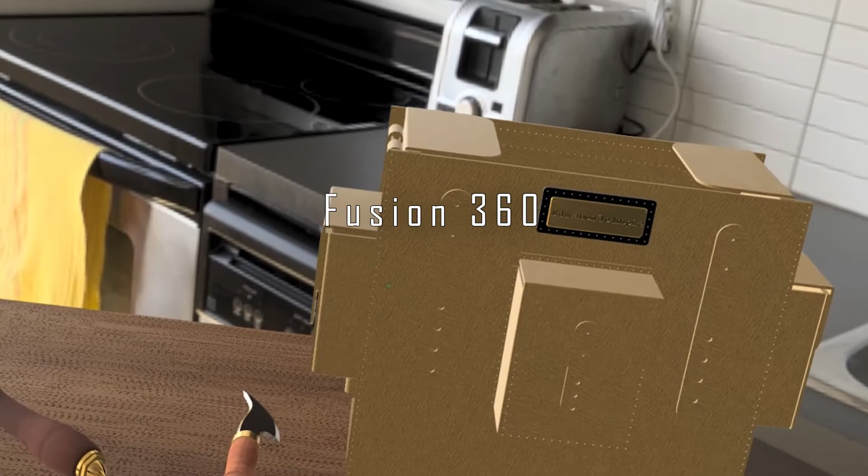Today, I'm going to show you how to use Fusion 360's sheet metal environment to model a large-scale leatherworking pattern.

The other day I was playing around with modeling this Explorer bag, and I wanted to make one that was a little bit more of a backpacking backpack than a laptop case. So I thought I'd just let you guys watch me go through the process. This is going to be a little bit less of a tutorial and more of a watch and learn demonstration. But I thought it might be fun for some of you who are getting more advanced with your modeling to check out what I'm working on, so hopefully you enjoy this.

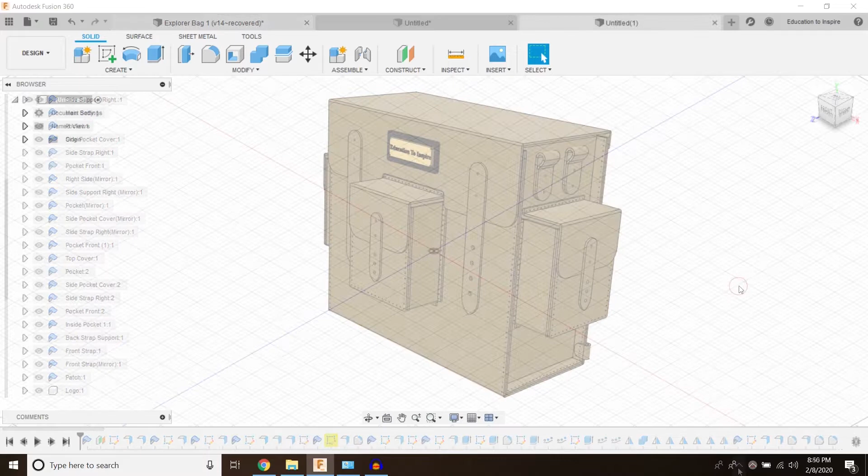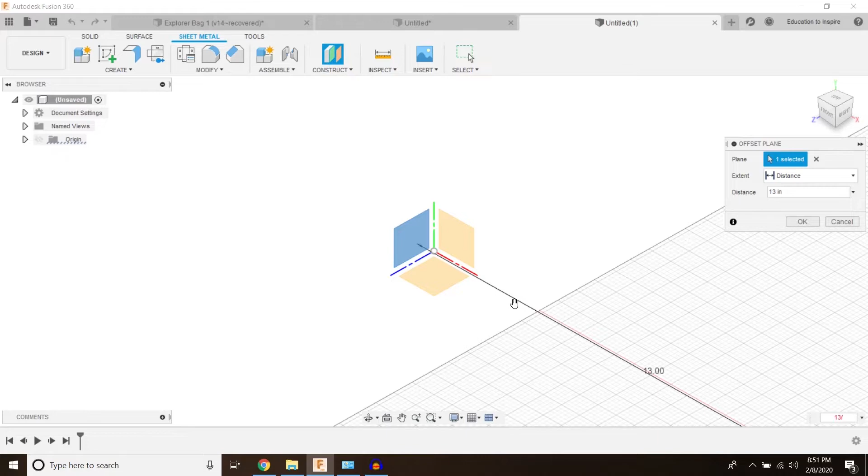Here we go. The first thing that I usually do is start in the sheet metal environment, and in this case I'm going to start by creating an offset plane. This is going to establish the width of my bag. I want it to be a 13-inch wide bag, so I'm going to say 13 divided by 2 in the menu. Create a sketch right there, and a rectangle, center point.

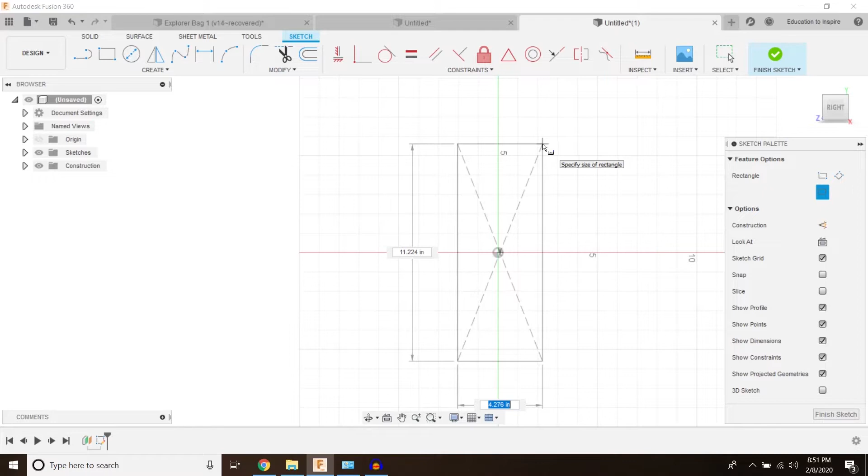It's going to be a nice big backpacking backpack, and I might alter the design later. But right now I would like it to be 8 by 23. There we go, so that's my first piece.

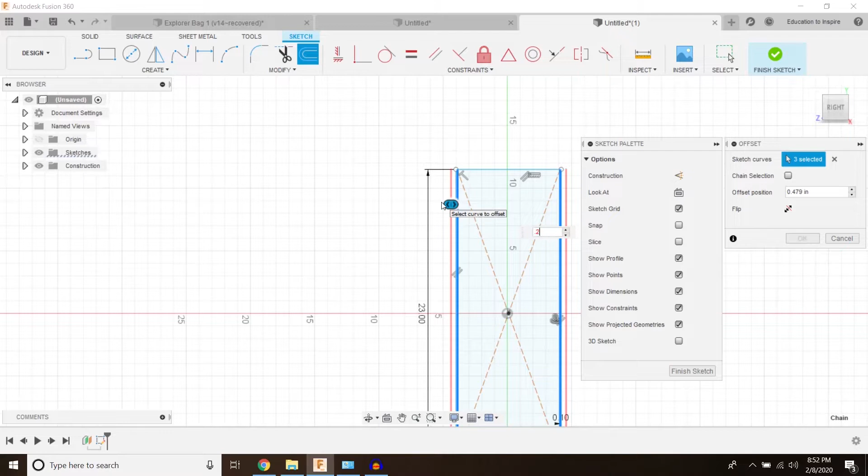I'm going to go ahead and create the other pieces right here. While I'm at it, I'm going to offset that by 0.1, the thickness I'm working with, and repeat that again. Select the first one, deselect that top line, and move that out twice the thickness. That should be all we need to get our first 3 components started.

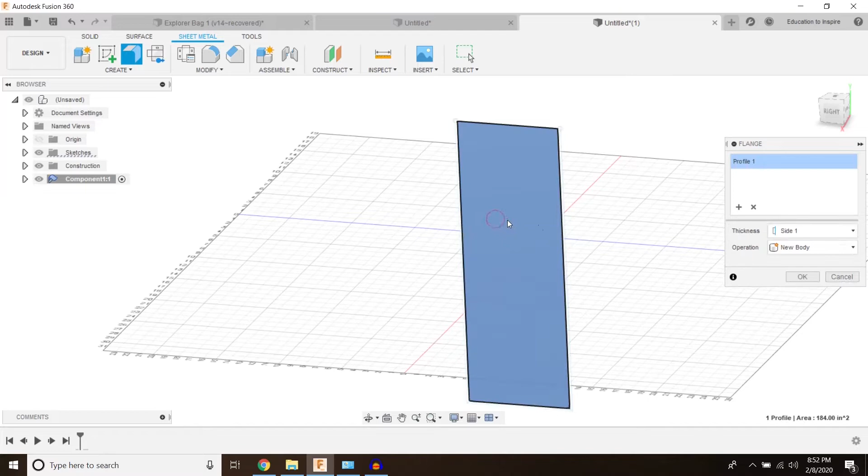I'm going to hit Finish Sketch, and now I'm actually going to create a component. So while I'm in my main body, click Component, create a flange from that right there. I'm going to hit OK, and start creating some flanges off of there.

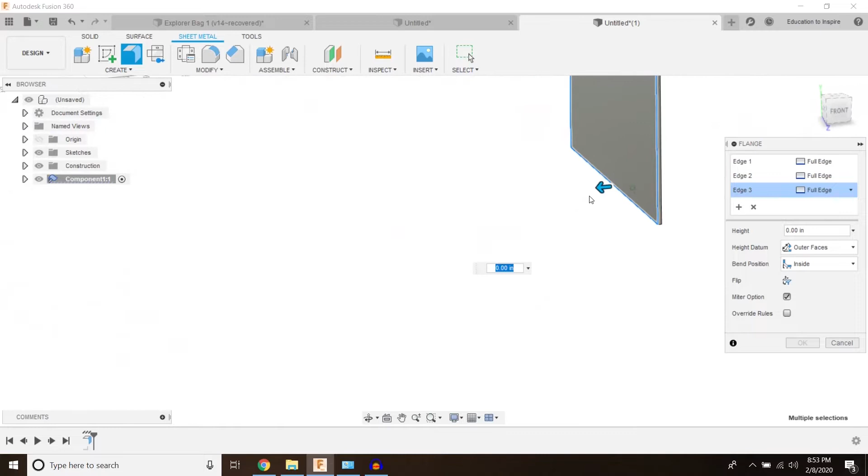And like that, to go about 0.4, I think, and I can always change that later. That's our first piece. New component.

Let's go ahead and start labeling these. Call it side. And this is going to be the brace.

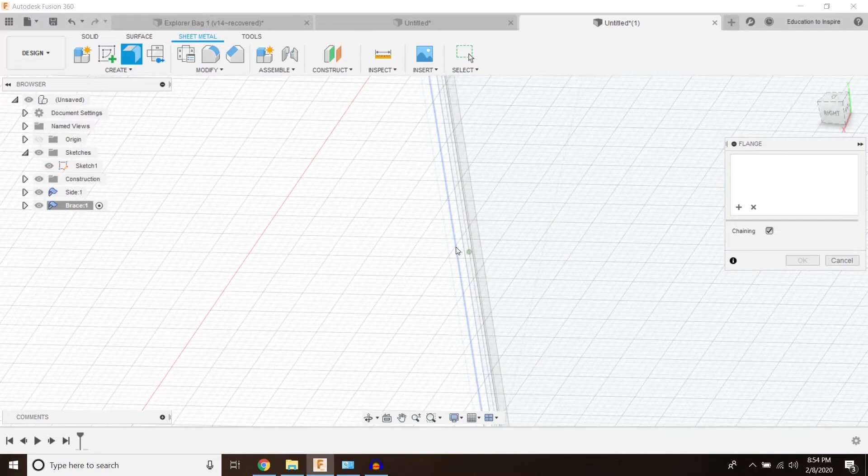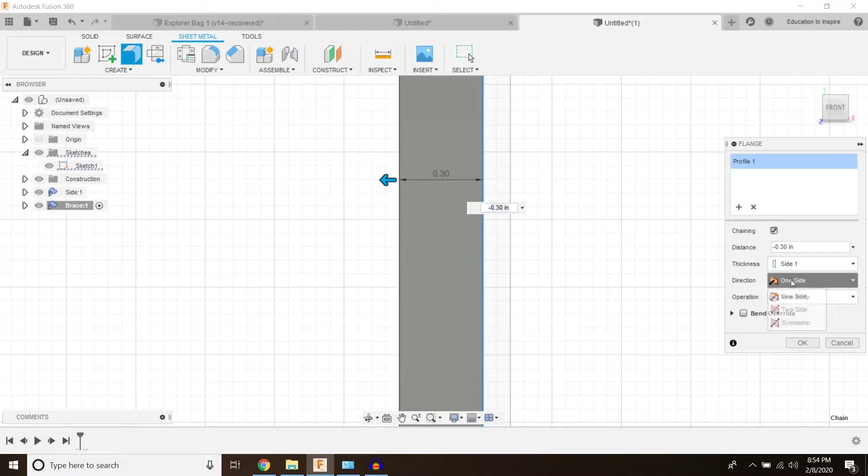So I'm going to turn back on that sketch, select that one, and come back. Looks like 0.3 there, and make it two-sided. Grab that other one, I'm going to come forward about a half inch, and that's going to give it some structuring.

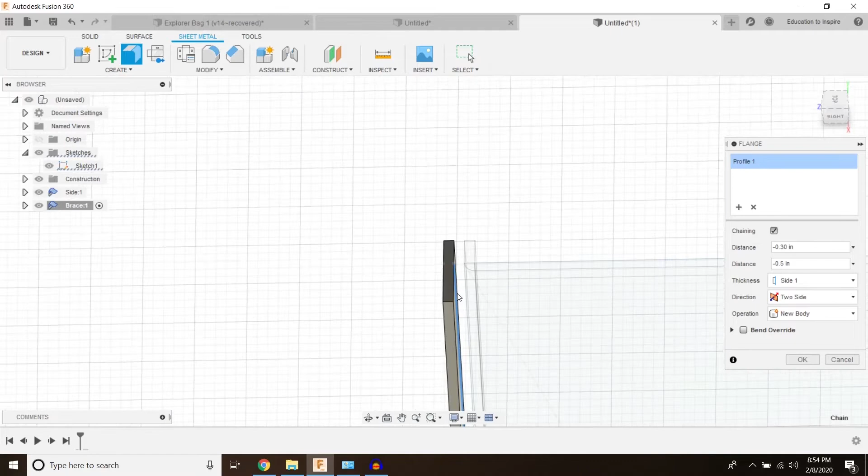Last thing I need to check is make sure it's lining up. And side 2. There we go, now we've got our pieces coming together.

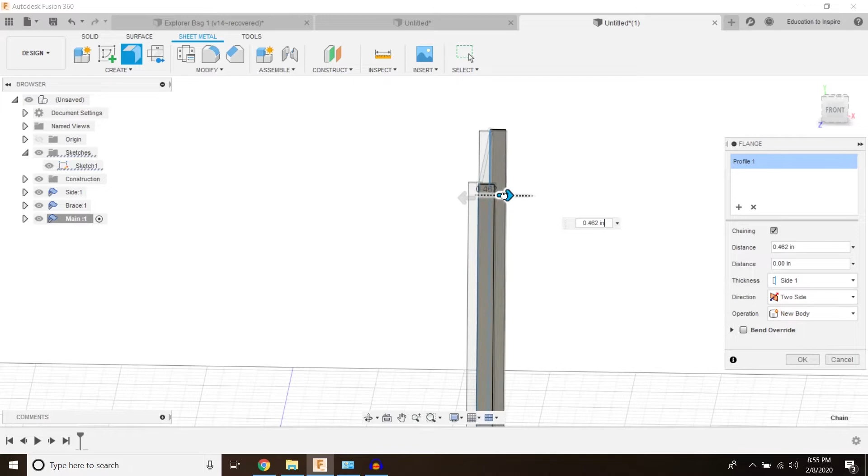Let's go ahead and create another component. This one's going to be the main component on here. And that's that outside line. I'm going to do that as a two-sided extrusion as well. That should be 0.4, 0.5, that's right, 0.5.

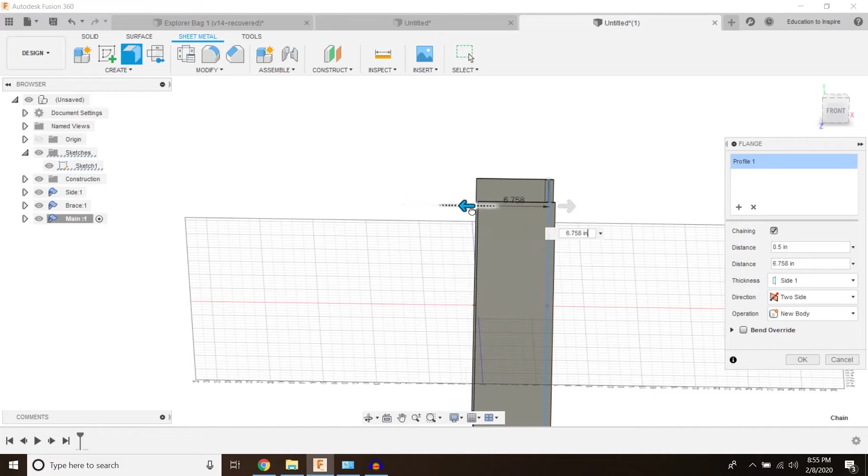And then this one is actually going to come back past my middle point, so I'm going to make it like 6.5—actually, I'll make it 6.7, just for visual purposes while I'm modeling.

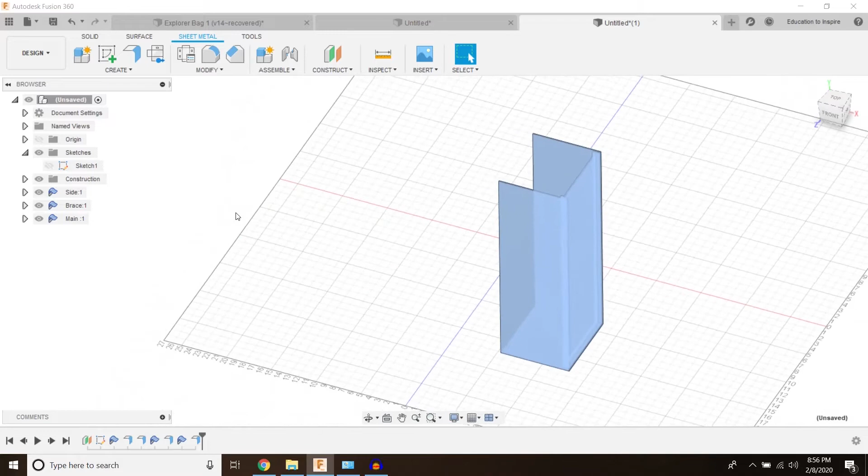Alright, so now let's shut off that sketch and take a look at what it looks like. And we've got a nice stitchable spot there and a stitchable spot there. Oh, forgot to do the outside edge—don't hit back, don't redo it. Double click on that flange, just switch sides. There we go.

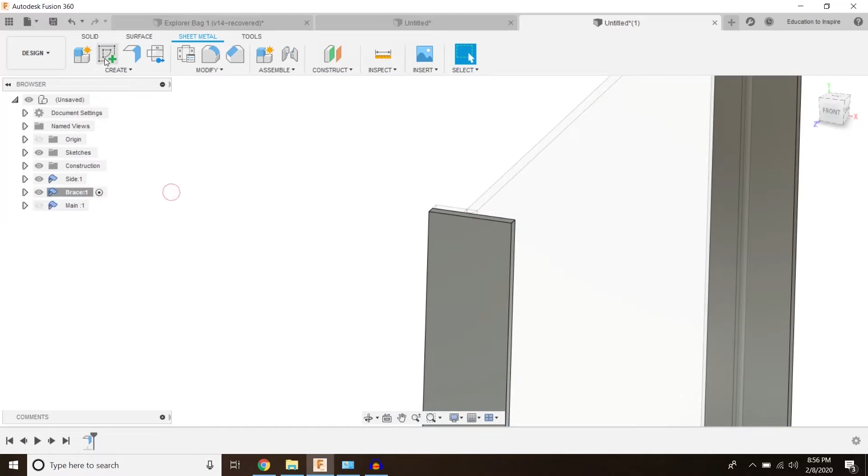Alright, so now I'm going to start putting some stitch holes in here. I'm going to shut the main body off because I want to stitch through just this portion right here. So I'm going to activate just the brace, put a sketch on that surface, make a circle, and start dimensioning. D for dimension.

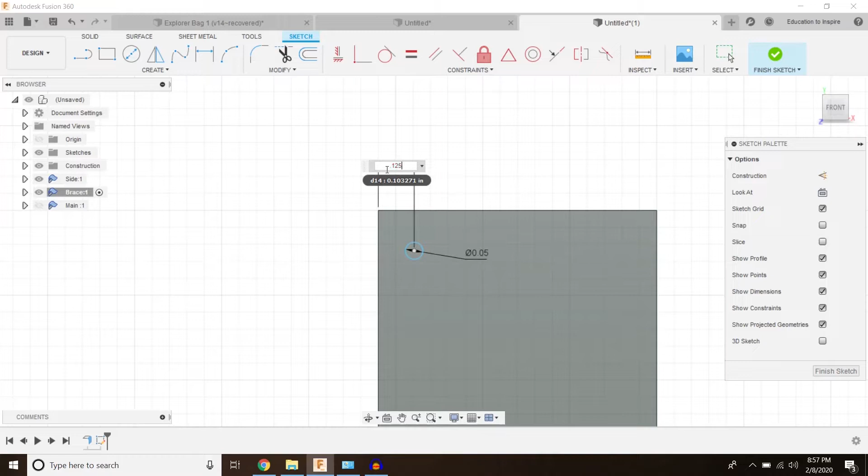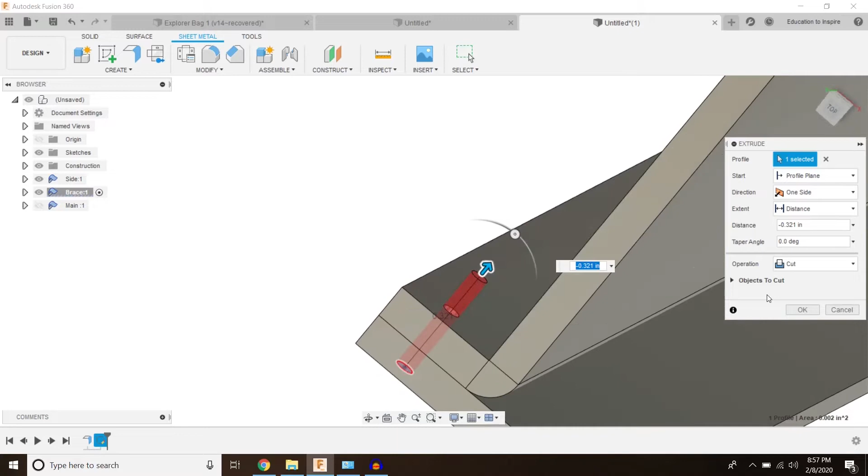0.05 for a stitch hole. However far from the edge you like—I just like it to be half the distance of my spacing. So I've got myself a spot where I can hit E for extrude, click, and cut through that right there. There we go, so that sliced through both pieces.

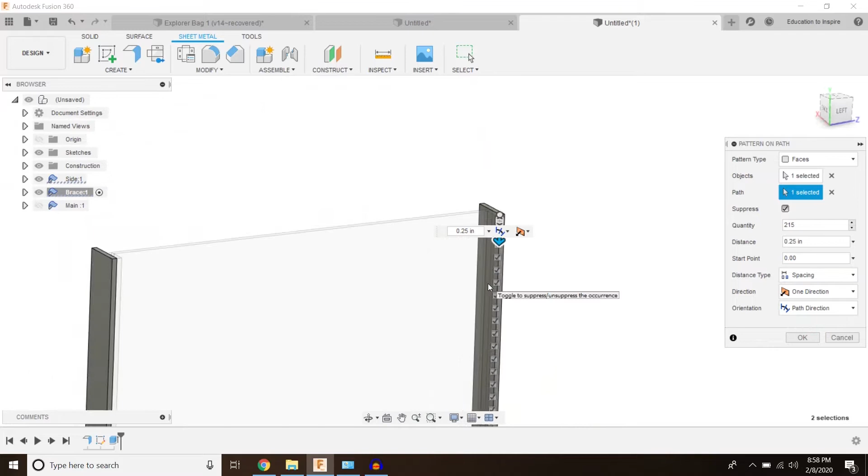So now I need to start creating my pattern along path. Create pattern, pattern on path, select your piece, select your path. You want it to be a spacing, and it's going to be a ton of them—I have no idea how many. Path direction, and come around to the other side and see how you're doing.

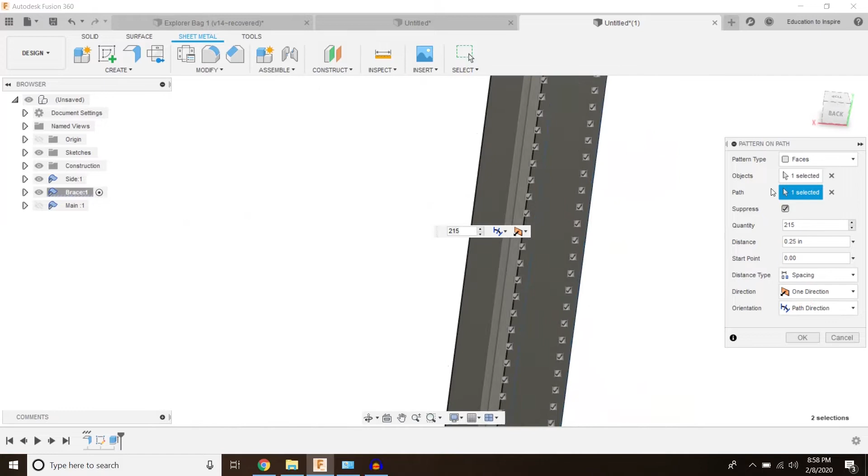I'm going to have to select a different path. Let's make sure I get that one right there—that looks much better. There we go, now come up here and check my spacing on the top.

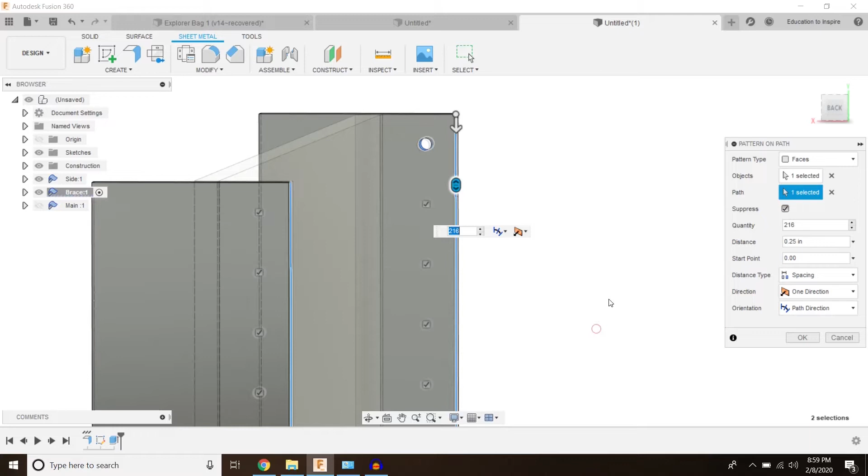One more. And I could check through it by setting my visual style to show hidden edges. Now I can see that I got that one. That's lucky that I got to do that one like that. Alright, so 216 stitches later, we've got ourselves our first set of stitches.

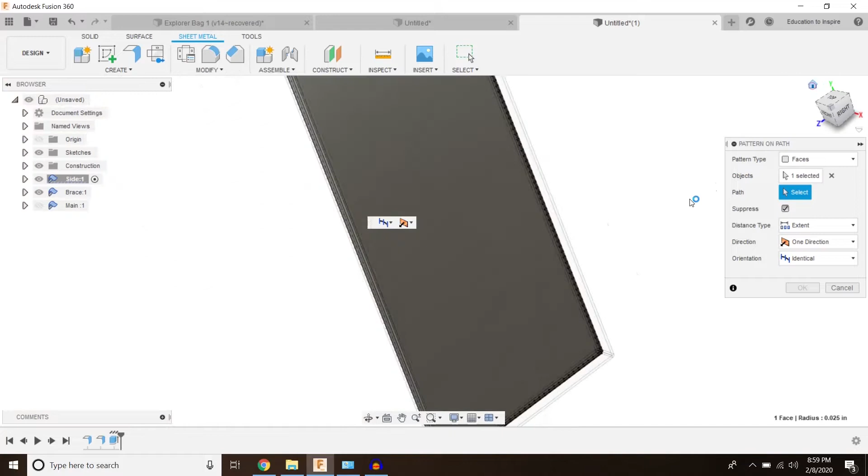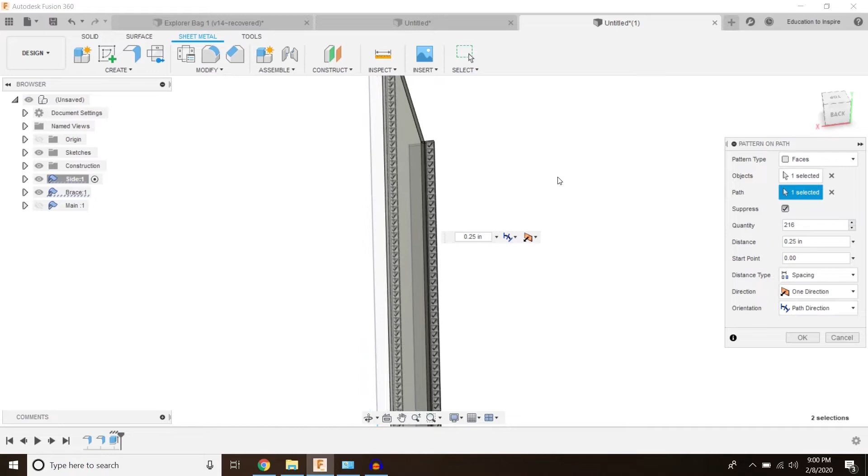Let's go ahead and put them in that side piece now. Create pattern on path. Grab the original surface, select the path. I want to make sure I get the right one this time. There we go, perfect. Pattern on path direction, extent to spacing, distance 0.25, number 216, and well, that just takes care of itself.

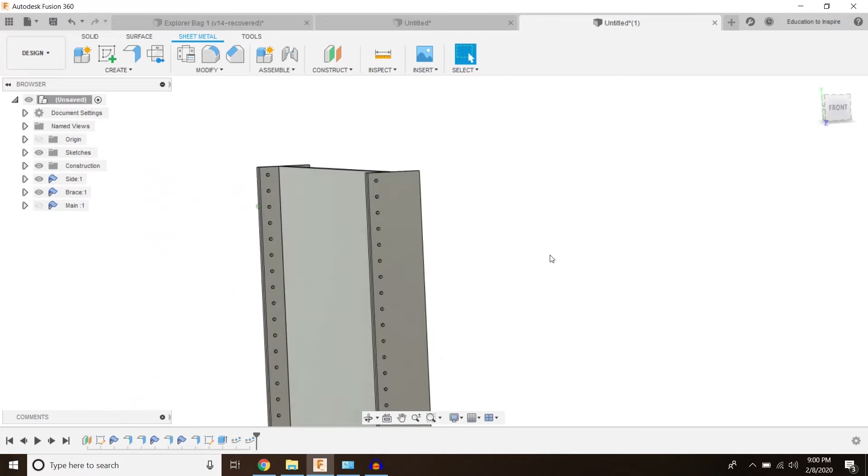So there we go, I'm going to shut that visual style back off to visible edges only. And we've got our stitched piece. So there's always a few little abnormalities along the way, like the way it goes through the corners of stuff, but just worry about that later after you've actually output the pattern, because you can change that in your PDF. So let's go ahead and put the stitching through our outside piece now.

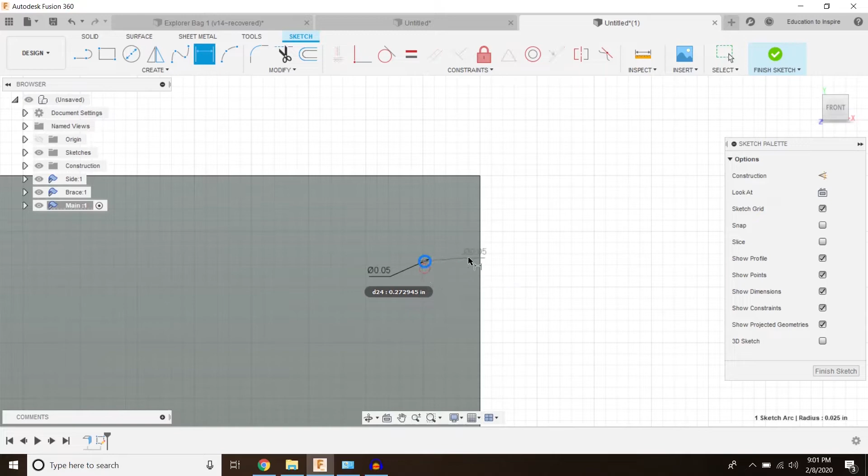Create a sketch, circle, dimension it, and you're probably going to want to play with your stitch size. That's just the needle I use. Measure your forks - can be a good way to get the stitch spacing you're used to.

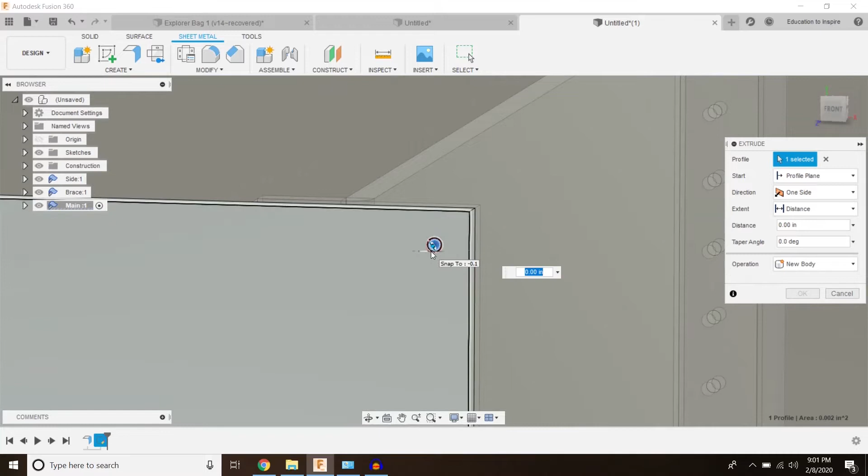Alright, there's my hole. E for extrude. Click on that thing, I'm just going to drag it through. I could say distance to right there or whatever, but I'm just tearing this out, so I'm happy with just doing it like that. Create a pattern on path.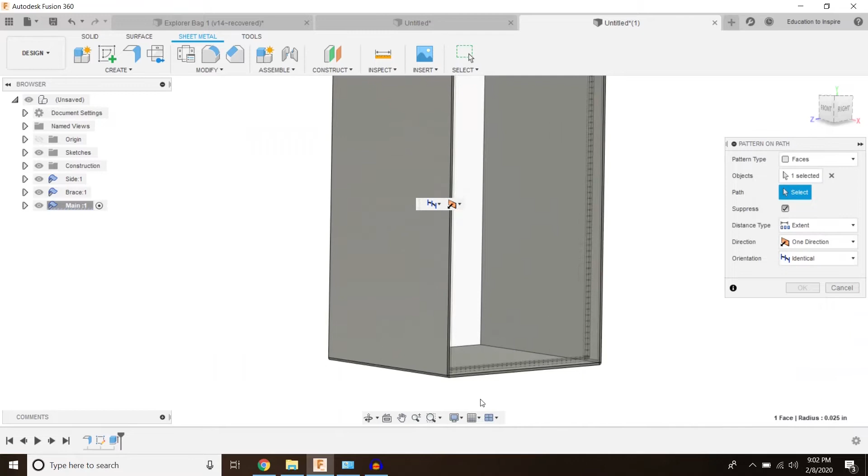Right there, select the path. Make sure I get a good constant one here. There we go, extent to spacing. And the direction we're wanting it to go. Start with the same number we had.

And see how we're looking. So it's a larger radius, so we're going to be coming out further. But that doesn't mean it's not going to line up pretty close.

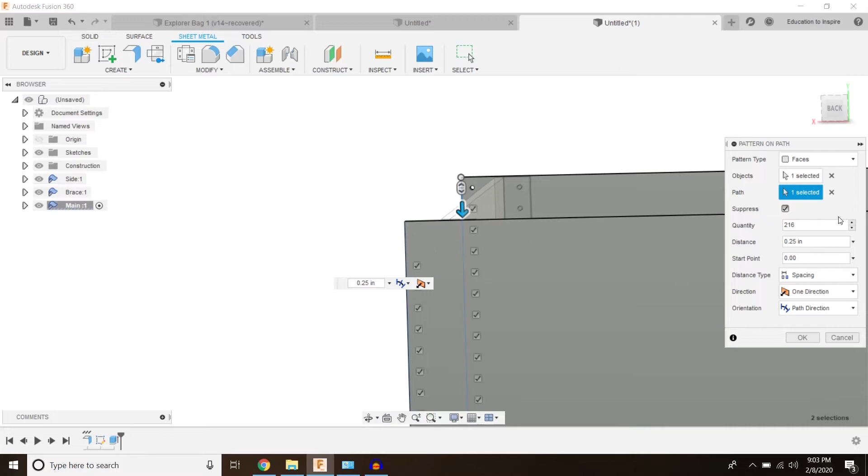And that's where I'm going to come to this side view here and turn back on that hidden edge so I can see where that is. And I can decide whether I want one more stitch and drag it down to it, or one less stitch and drag it up to it. And in this case, I'm going to opt for one more stitch.

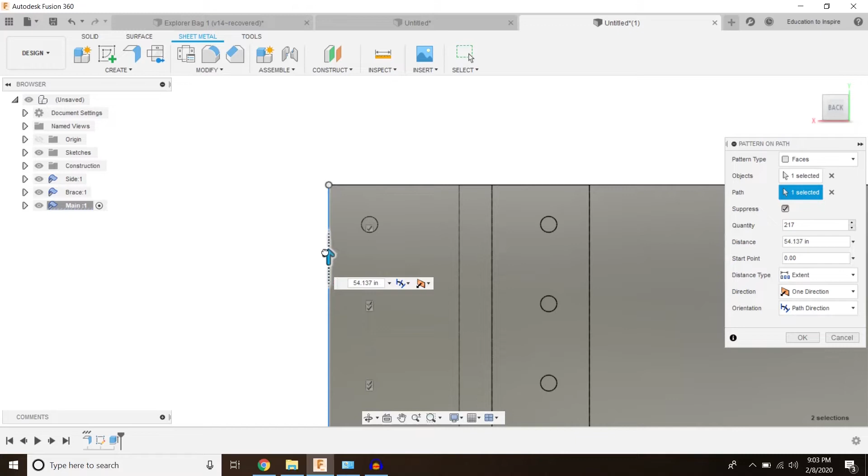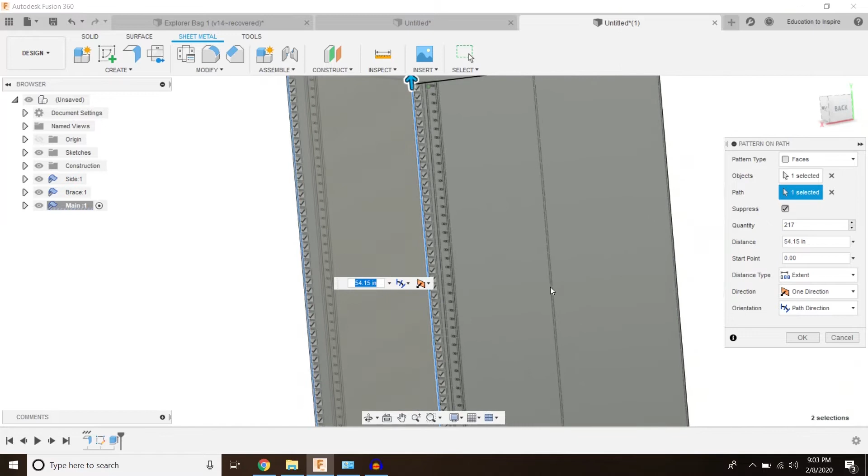I'm going to hit extent, and I'm going to drag that piece up until it's lined up. Pretty close, and there we go. And now I've got what is pretty close to a 1/4 inch spacing across the whole thing.

Let the computer process, hope for the best. If you're working on an older machine, be patient with it. All right, let's take a look at what we've got so far. And now let's do the ones on the main brace. Create pattern on path.

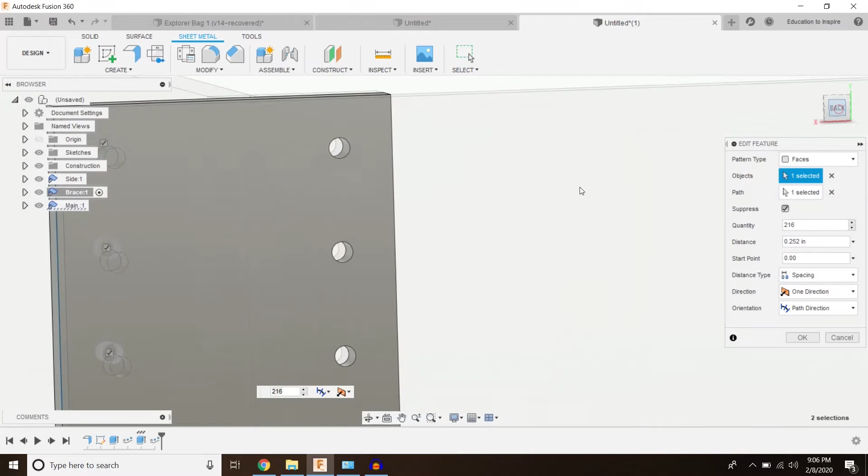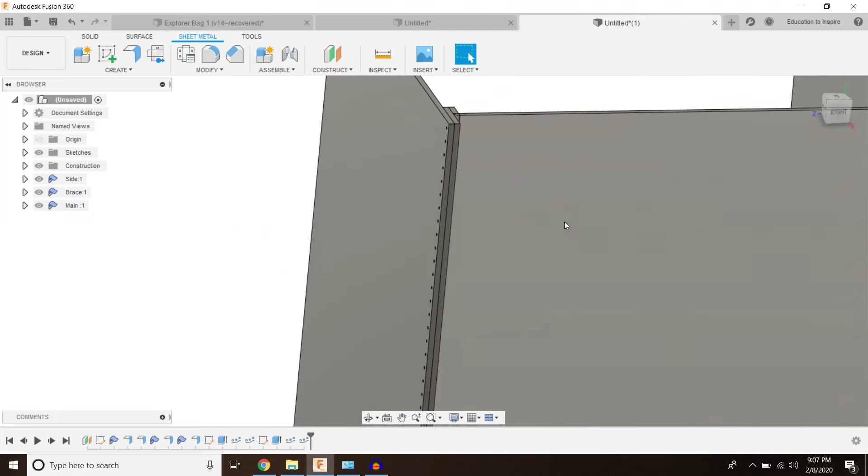There we go. So now we've got our stitches for the piece on the outside edge and the piece on there. Now, I've seen a lot of you guys putting together bags like that. I really like that style because it makes it easy to stitch together. So now let's go ahead and create a pocket on here.

So I'm going to create a whole new component, and I'm going to create a sketch, and I'm going to do that right on the surface of the bag there. I'm going to use a center point rectangle. And I want this pocket to be 6 wide and 6 high.

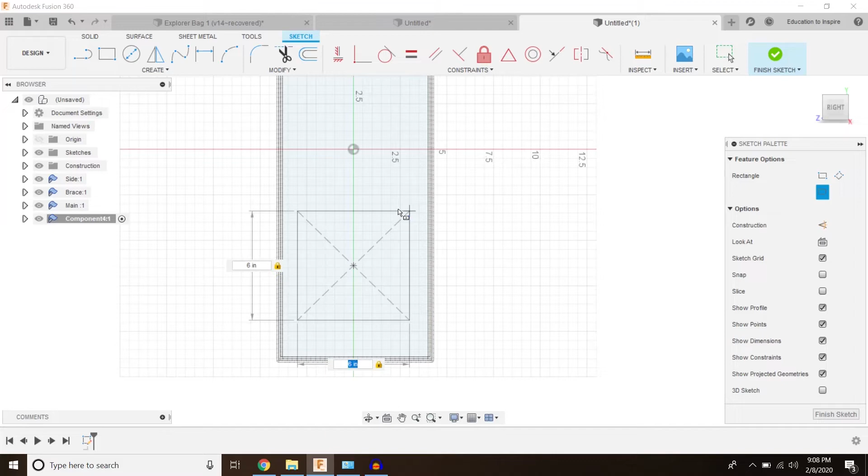You know, now that I look at it being 6 wide, I think I want it more like 5 wide. There we go, that looks better. And make that about 2 inches from the bottom. All right, so this is going to be like the beginning of my pattern.

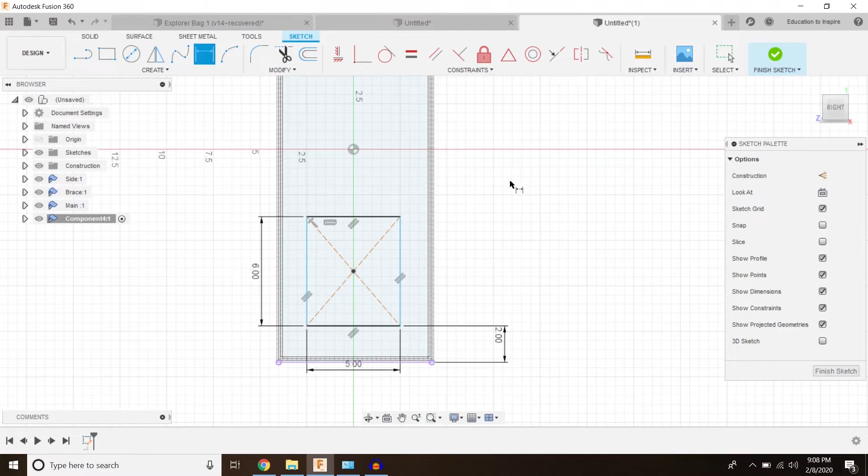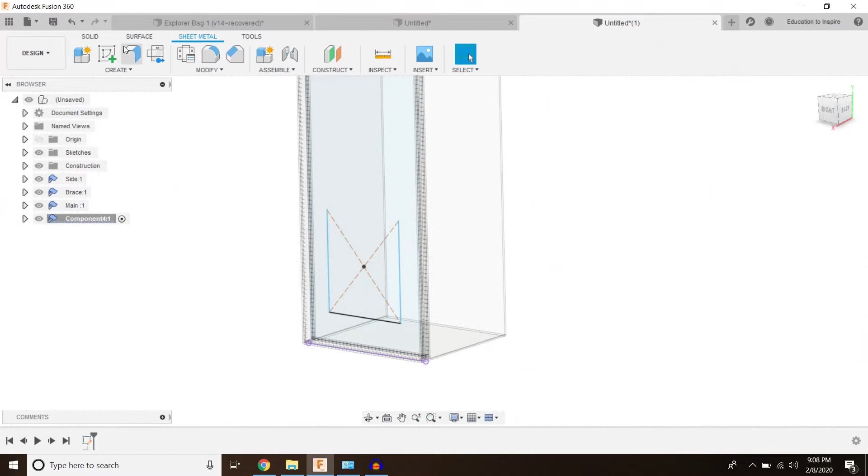So I think I'm going to start by - you could either create the border piece or the front, and I think I'm going to create the border piece just because it's easier to work kind of from the bottom up, so to speak. So I'm going to create that flange. And if you want, you can be working up here in the, with seeing everything else.

I want those pockets to come out 3. So I'm just going to enter exactly 3. There we go.

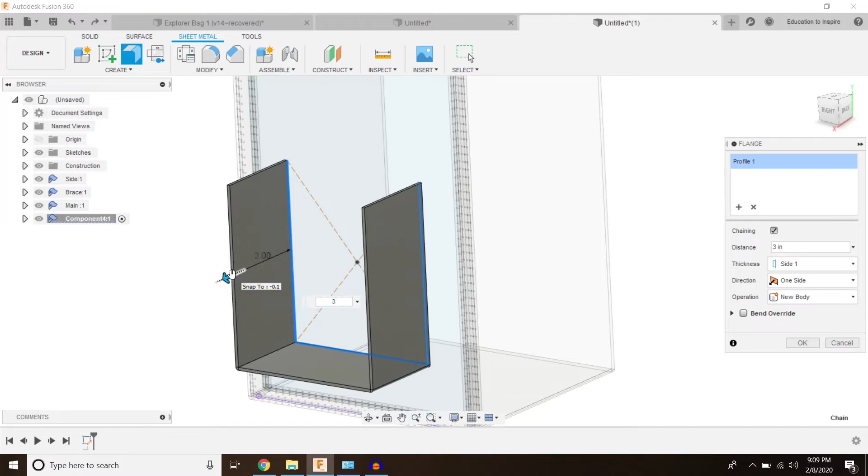I'm going to come back. Don't go into the other environment, do stay in your component. It's going to try and create a body in the other thing. That's totally worthless - it's nice to look at it, but stick in this one component. You can come back up here. That was interesting to see it. As soon as I clicked it, it put it in the other component.

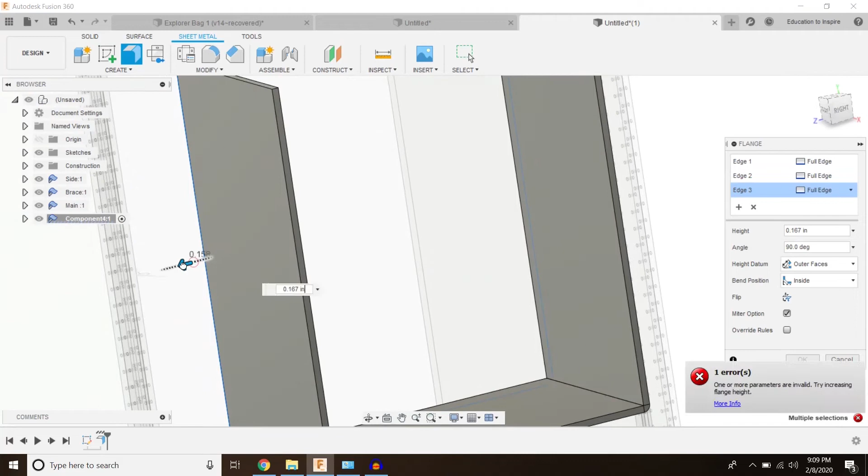So let's keep creating some flanges here. I like to do this one as a piece coming outward. About 0.4 or so, like that.

Come up to the top view to make sure that you've got an appropriate inside, outside. This time the inside's just perfect. I'm going to make that 0.4. There we go.

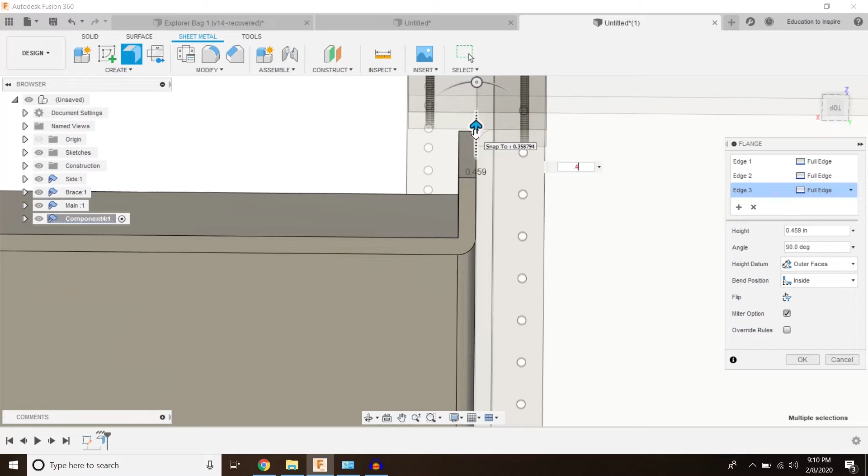So now we've got like a lip. You see it mitered this. That obviously isn't going to fold out in real life, so I'm going to come back here and double click and deselect mitered edge. There we go. I'm happy with the way that looks.

And another flange - let's do the inside piece where I'm going to attach the face of the pocket to. I like to just have like a sew-on face. And let's bring that in 0.4 as well. There we go, and that one can be mitered because you're actually gonna sew the piece on there.

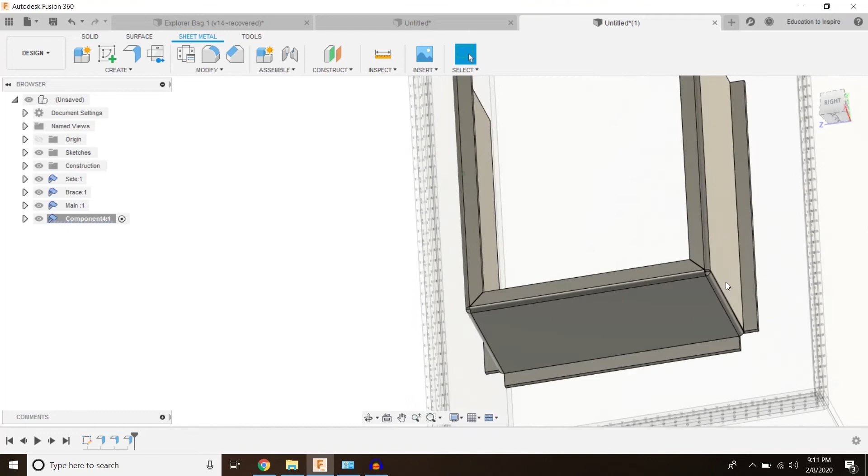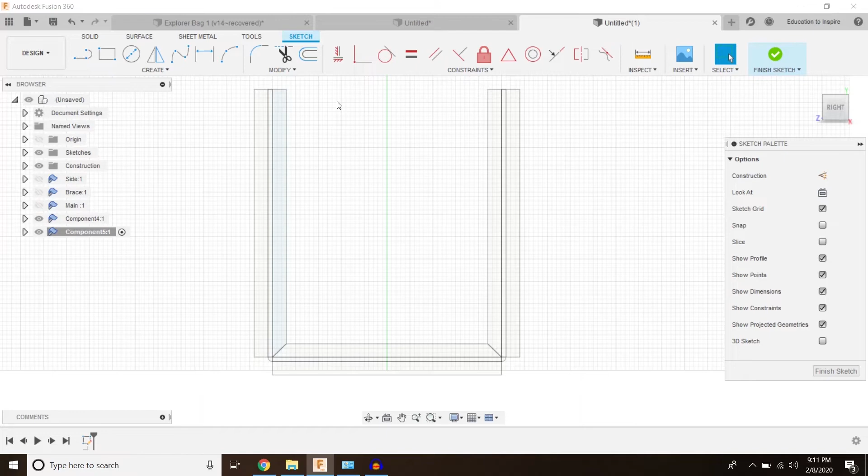So, new component, it'll be up here. Create that new component out of the appropriate material, and sketch this time on that main surface. I'm going to go ahead and show none of this other stuff. P for project, so that I can project some of this geometry around here. I'm going to grab that point there.

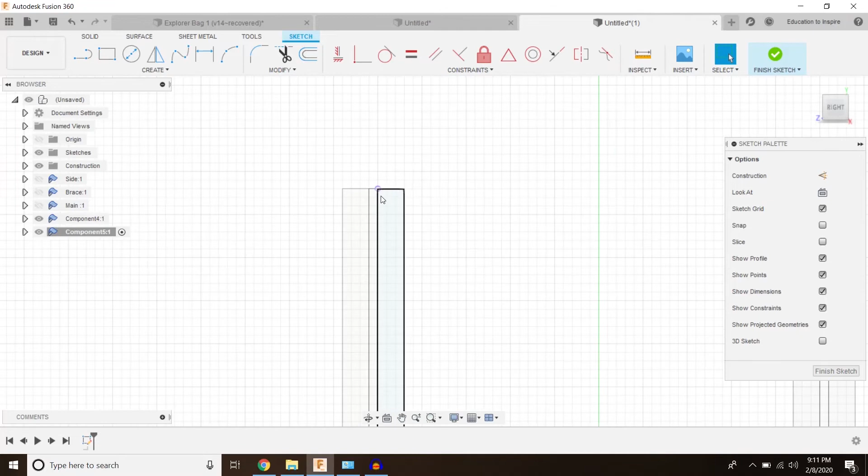And that point there. That should be all I need. Hit OK. Grab a rectangle from that point there down to that point there.

And this one's going to have a stitch in it, so I'm going to go ahead and create that here. D for dimension. All right, there we go.

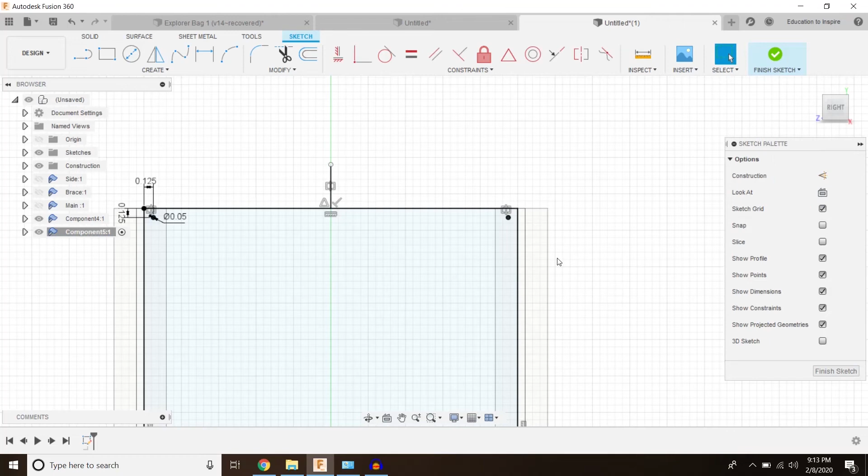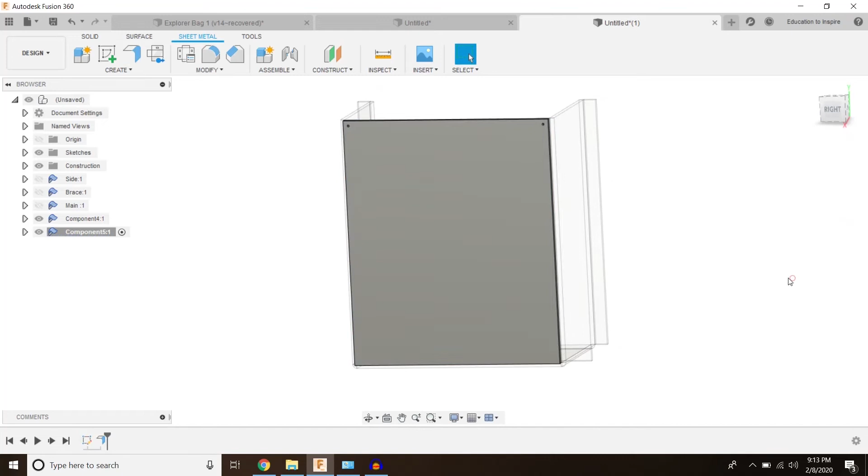We've got a sketch of an outside face with some holes in it, and I'm going to leave and do those chamfers afterwards, I think. Finish sketch, create flange, make sure you select both of your pieces there, and now we've got ourselves a body. Now, I don't want that to come to a square edge like that, so I'm going to go ahead and modify and round those over.

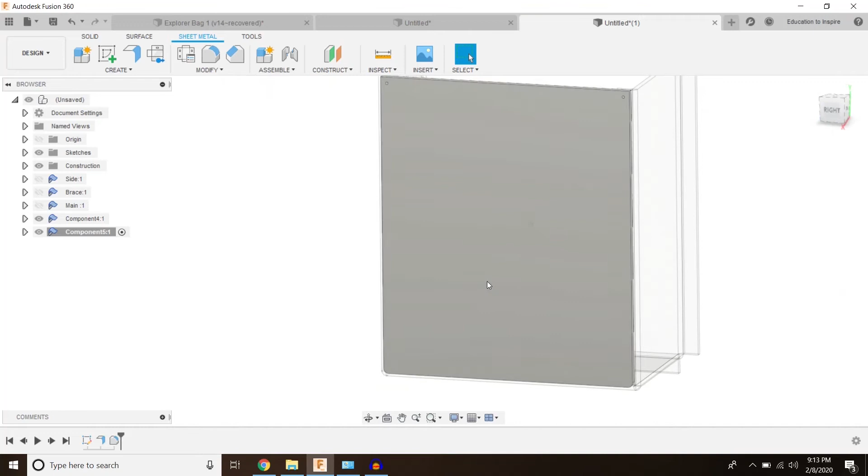There we go. So I've got my face rounded over, and we can kind of look at what the rest of the project looks like. Now we've got a half of a bag with a pocket on the side. So I'm going to go ahead and do those stitches in fast motion here because I'm pretty sure you guys already have the creating a stitch thing down.

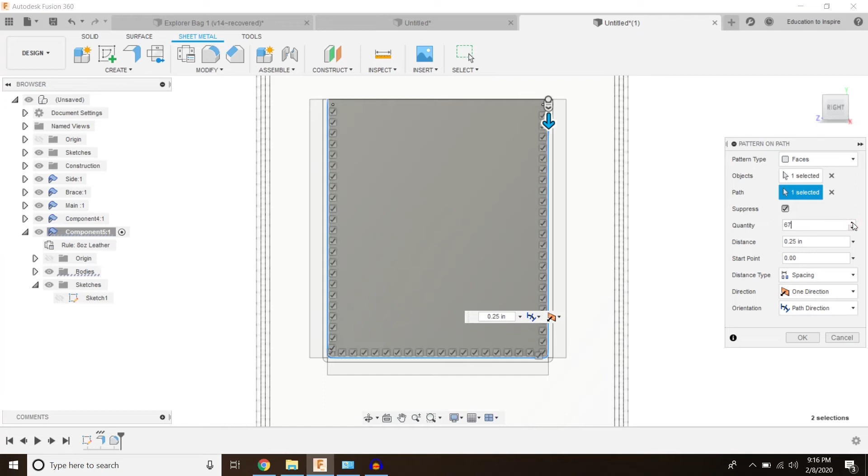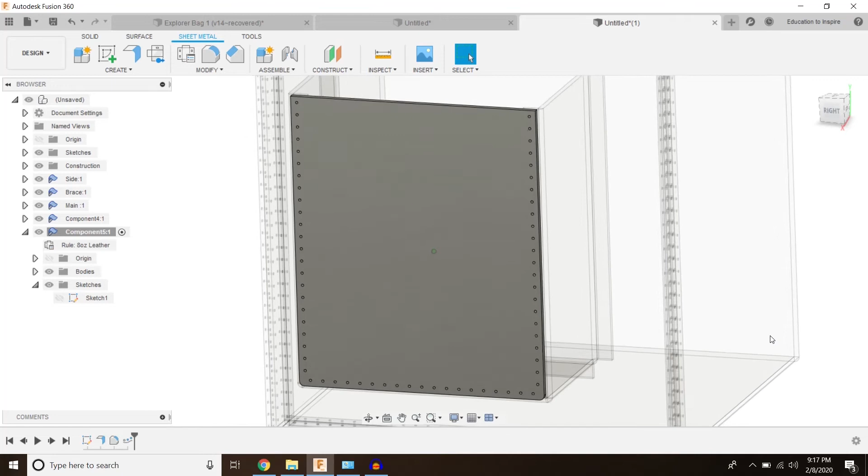All right, there we go. We've got the stitch pattern on the front. And if for some reason you wanted the spacing different here, you could do it as a 2 rectangular patterns. I did another video just basically dedicated to that. So now I'm going to go ahead and switch bodies and start cutting through this next one.

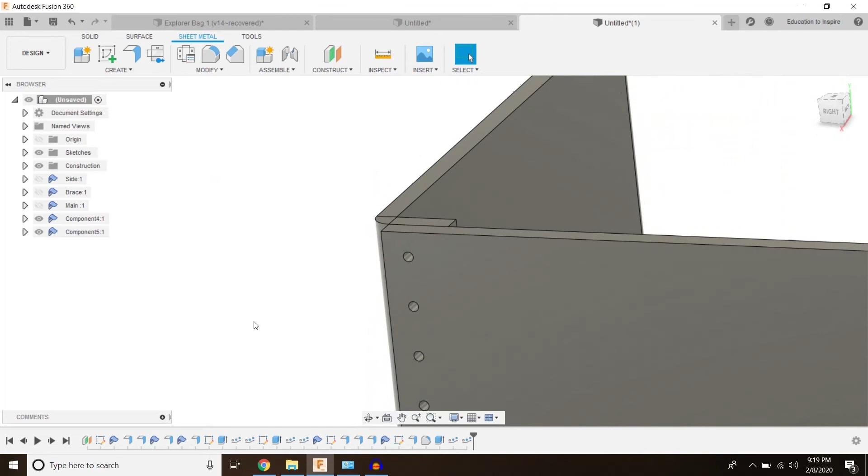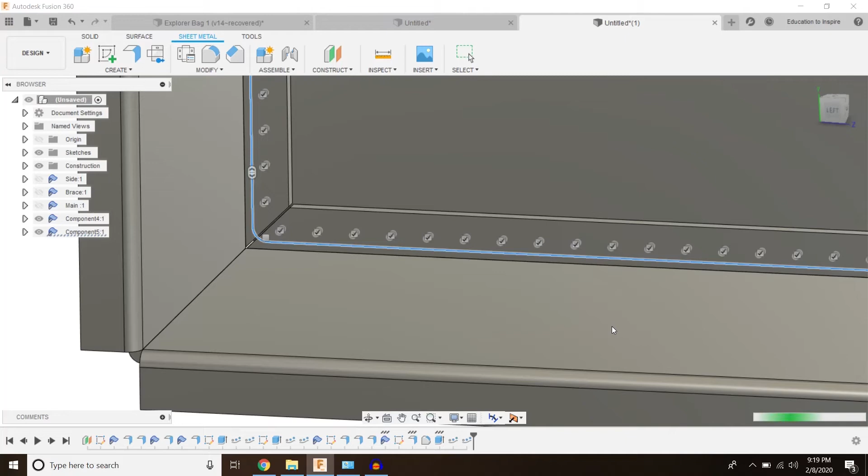All right, there we go. Now we've got the stitch spacing through both pieces there. Oh, there's that one little one right there. I think I'm going to go ahead and change that. Just deselect, it has to reprocess. There we go, I'm happy with that. So now I'm going to do one along this outside edge of the main body.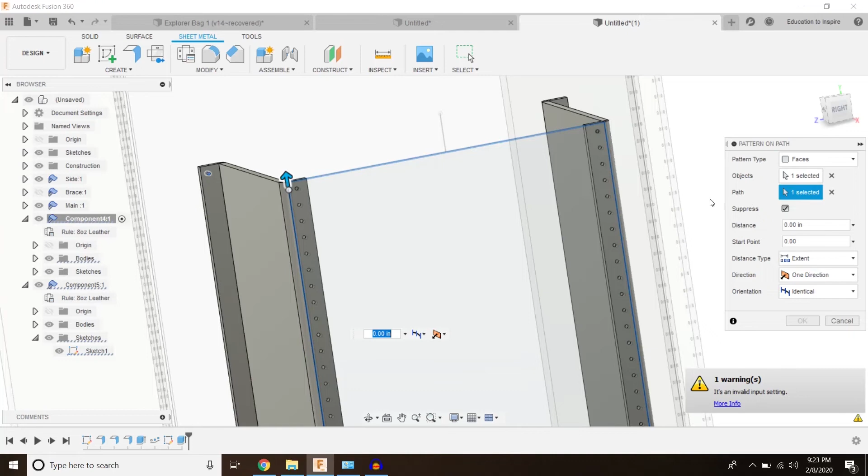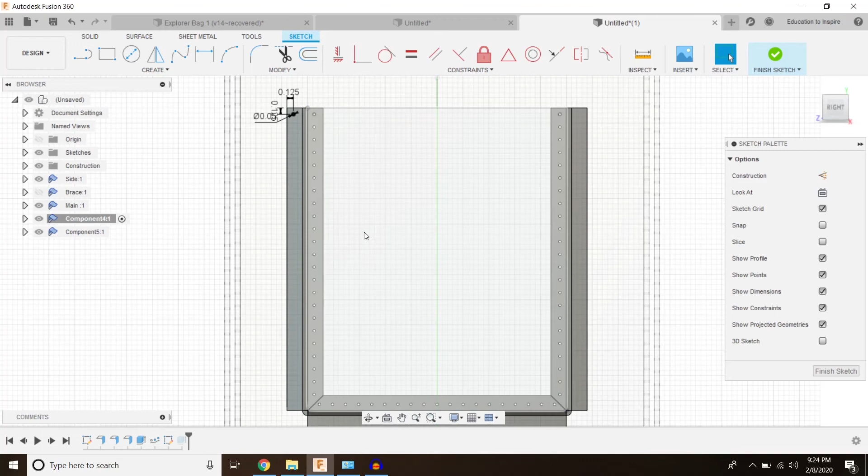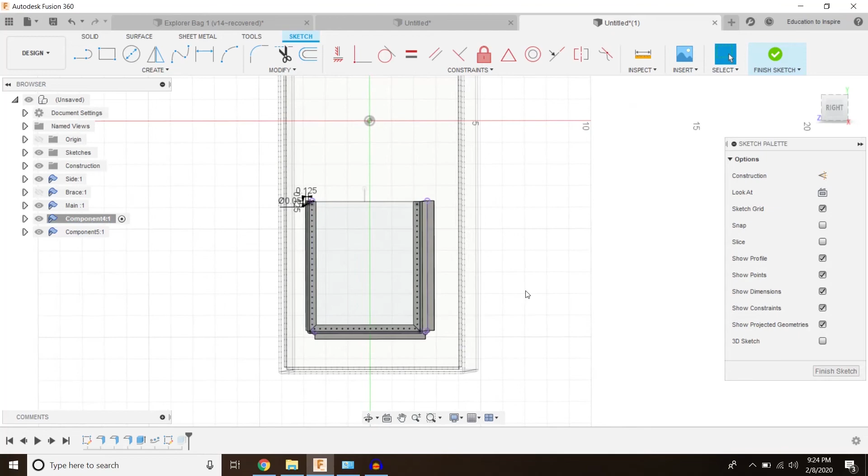Alright, so I was having a little bit of trouble getting that path to carry around there. So I'm going to go ahead and go back to that component, and here's the sketch that I created it on. I'm going to go ahead and create a path to actually follow along. So I think I'm going to project this outside line. There we go. That way I've got an actual line to follow along.

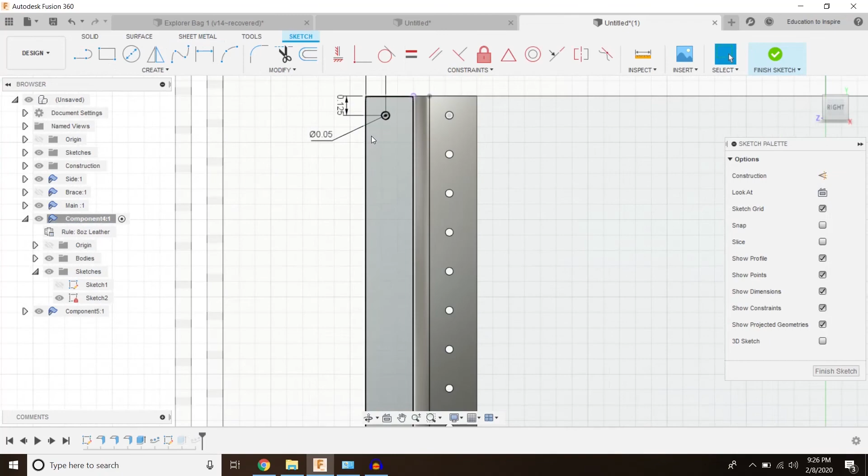Alright, so that worked with getting the stitches around the outside edge, but I want to make sure that it's the right distance from the top, so I'm actually going to come back here to this sketch, and I'm going to mirror a version of this circle across the center, so that I've got something just to look at when I create that pattern.

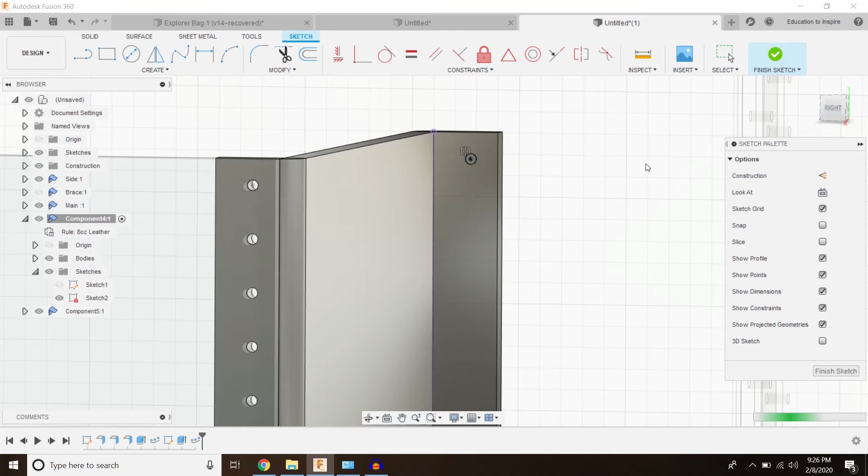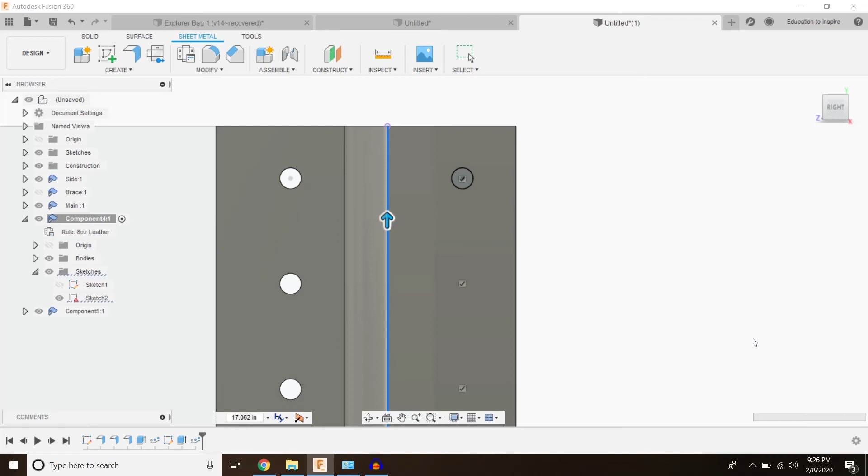I've got to let it process again. So you see, now I can see where my stitch should actually line up to. And so I'm just going to come back into this extent, and put that right where I want it. Let the computer process, and with any luck, we'll have some holes to line up. There we go, yeah, that looks nice and clean.

So, on surfaces like this, you could definitely do a rectangular pattern. That way you can ensure that these line up the way you want them. But, if you're not picky, just come in here and deselect the ones you don't like. But yeah, for that one, I think I'd use rectangular pattern. And I can always change that later, the way that I do the pattern. So I think I'm just going to go ahead and keep rolling with this one.

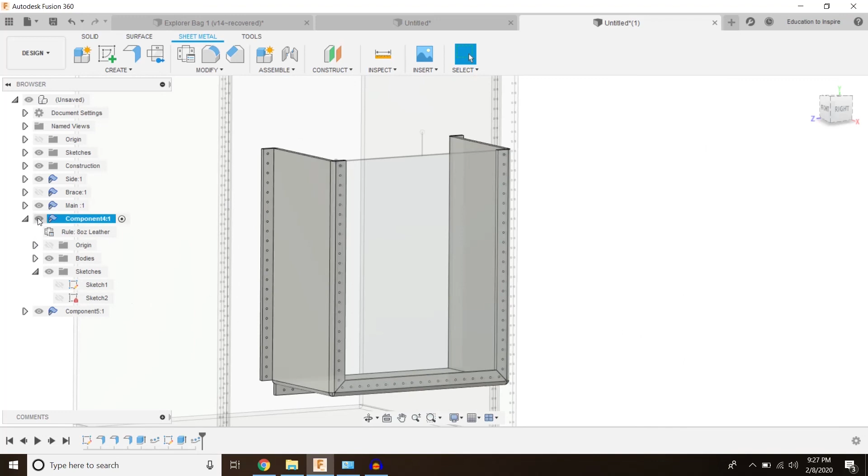So now I need to create one last stitch pattern along the main body.

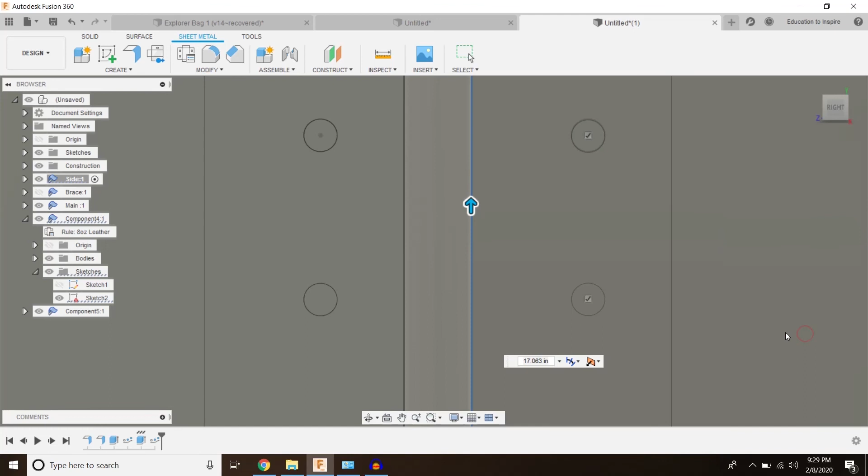All right, so that's a pretty good start to this bag here. We've got a pocket coming off of the side, and the pocket itself has a stitch pattern to attach it, a piece that's gonna work as the main and the front. We've got a nice side panel and part that attaches it. So I think I'm going to call that a tutorial for now, and I'm gonna take a quick break.

And I'll do number 2, where I'm gonna mirror this across to the other side, copy the other components to the other side, and start to generate the rest of the pattern.